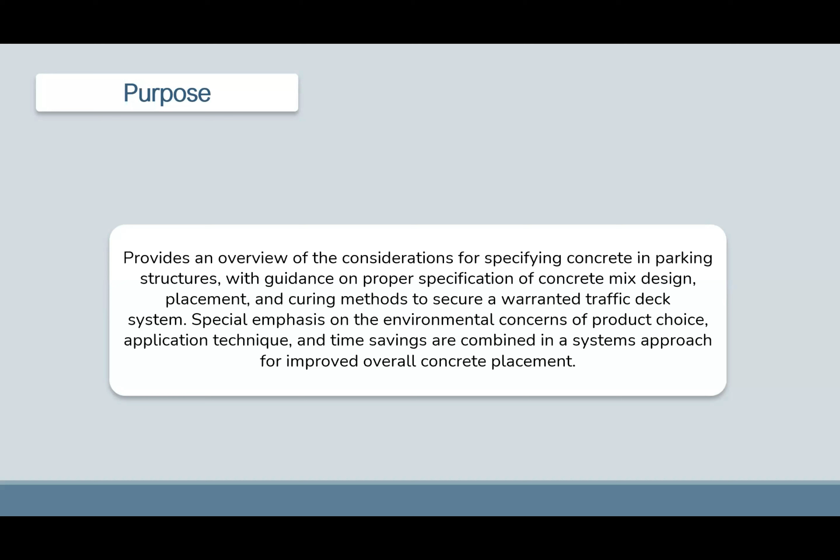In order to build a 100-year parking structure, I think it's important that we begin with the fundamentals. So I'm going to go through what I consider best practices, or steps we should take to make sure we get this process completed. I am a very linear thinker, so for those of you who have questions during the presentation, I don't want you to think I'm ignoring you. I'm going to walk through a process and a story this morning, and I will answer questions at the end of the presentation, but don't be afraid to add them while I'm talking, because we'll make sure everything gets taken care of for you.

So let's look at these four points of sustainability. This is not new information, it's not groundbreaking—I'm not introducing something you've probably never seen before—but it is important to begin a foundation of building based upon some steps that we want to take.

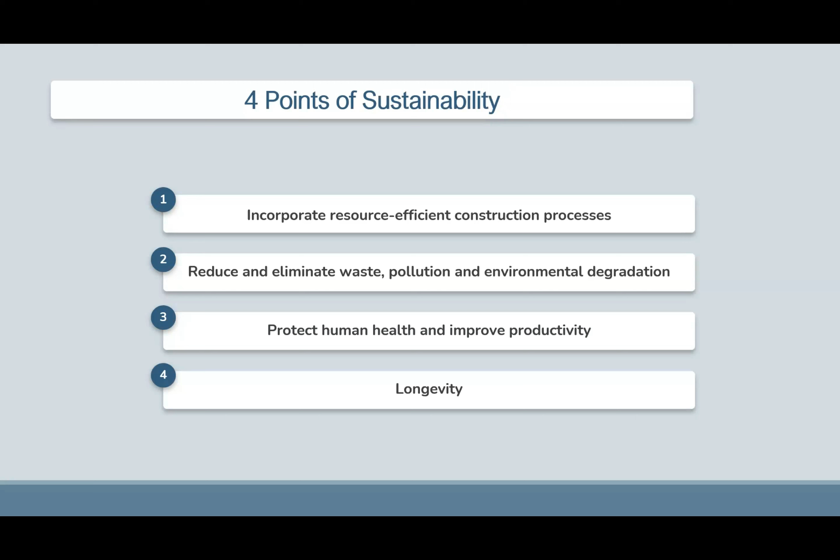We can actually take it further than that. And there's proof we can take it further, because if we're going to take on the challenge of building a 100-year parking structure, we need to make sure it's possible. And it is. You can look back.

Now there's lots of people out there today that say, hey, the Romans invented concrete, so obviously we have access to Roman technology or we've lost it. But honestly, the truth is the Romans didn't invent concrete. That's a myth - this is the nerd in me coming out. Actually, the Assyrians created it, and then they were conquered by the Romans, who took it back to Rome and built things. But that's not why we're here, right?

So this slide, I want to explain a few things. What you're looking at is a core sample - why am I showing you a diver? Obviously that's the question, right? We're talking parking structures, and the reason I'm showing you this is I want to challenge the way you think about concrete.

Now, this core sample comes from the breakwaters of Alexandria in Egypt. It is over 2,100-year-old concrete, and it's interesting in that it's harder, denser, and stronger than anything we build with today. Yet it's been subject to a saltwater environment, the harshest environment we can imagine for construction, and it's lasted for over 2,000 years.

But as architects, as design professionals, I think our goal - your goal - should be to build aesthetically pleasing, functional structures that last a long time. Now, almost everybody in architecture recognizes the bottom photo here. This is the Pantheon in Rome.

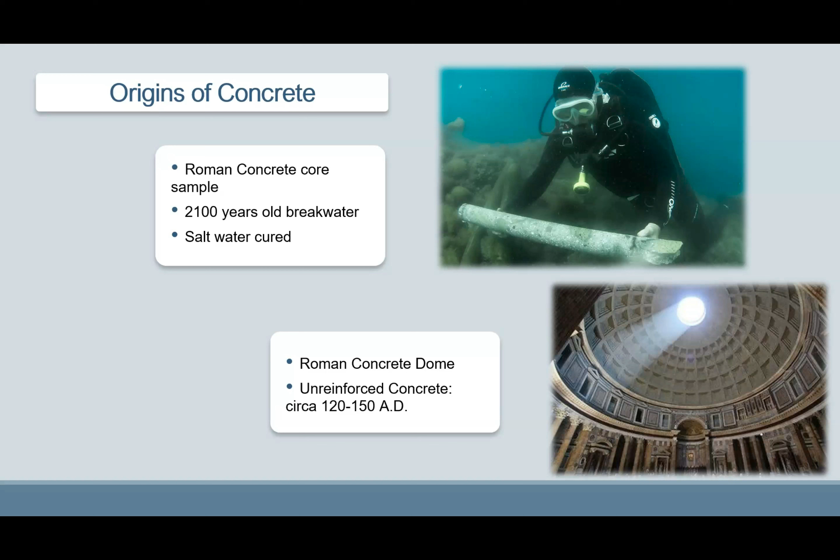So the question then becomes, well, what changed? Why is it that the Romans and others can build things that last centuries and we can't even build things to last 100 years? And honestly, we lost the information. If you think about it, we've had to suffer war, disease, famine, and pestilence. And as we've come out of this process of relearning, reinventing, and redesigning things, that's literally what we've had to do when it comes to concrete.

Structural concrete use in America is only 127 years old. It's been around a little bit longer than that, but for structural concrete, it's only 127 years old. So we got to do a little bit better.

Now, as we've come out of this dark period, if you think about this in a linear process where we've come from in our past, we've gone through the process of modifying and changing our mix designs. We started taking waste products and dumping it and burying it in concrete to make it go away, but also because we knew we had benefits. Fly ash cooled things down some. We invented secondary supplemental cements, right?

Beginning in the 1970s with the authoring and publishing of a book called Silent Spring by the author Rachel Carson, we recognized that we had to do better to improve the overall quality and health of those around us. And so we started developing VOC laws to control volatile organic compounds. EPA has managed to walk through regulations on how we process and how we manufacture materials.

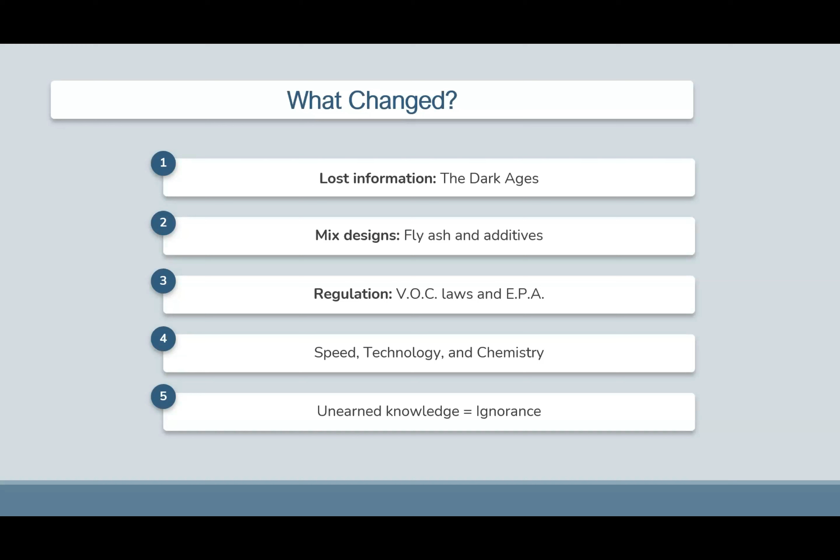So let's talk about concrete, right? What is it exactly? Well, we all kind of know what it is, right? It's the number one building material in the world today. Whether you calculate that by tonnage, square footage, or dollar amount, we build more with concrete than any other building material in the world. It's 90% of the mass of your parking structure. So what is it?

According to the American Concrete Institute, concrete is a composite material that consists essentially of blah, blah, blah. That is an absolutely boring definition. It is.

I like my own definition. Think of concrete as a complex, three-dimensional dynamic building product. If you think of it that way, it's no longer an object, it's a three-dimensional dynamic building material. We want to understand how it acts and behaves, because it has a distinct behavior. When you know how it behaves, we can control and prevent issues like cracking, dusting, spalling, and all kinds of other problems we don't want to happen.

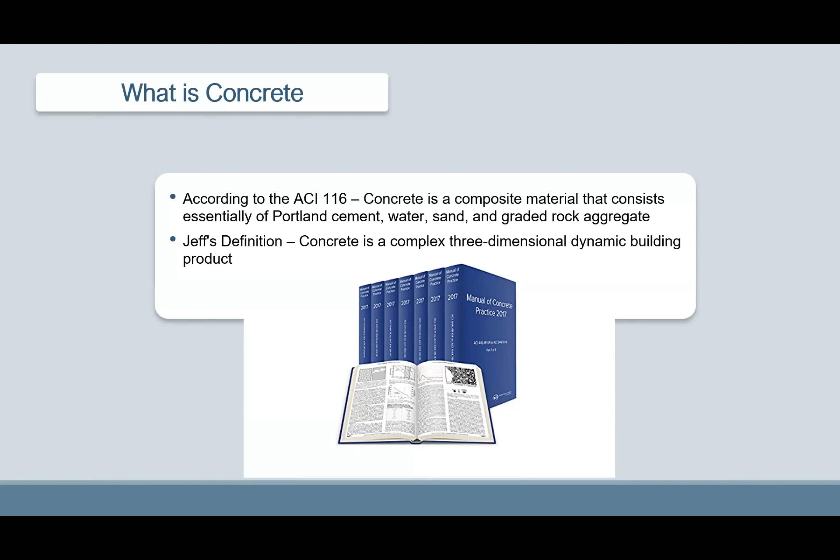So let's take a quick quiz in your own mind, since this isn't a live presentation. Are you aware that concrete has 3 states in its life cycle? See if you can choose the 3 states quickly in your mind. I wish altered states was one of them, but unfortunately it's not. So this is the concrete life cycle.

It has a plastic state, a curing state, and a hardened state. It's important to understand each of these 3 states so we can positively affect the concrete as it goes through its life cycle, and positively affecting it improves our process.

If you graph it, this is really what the concrete life cycle looks like. The moment of catalyzation is when the process begins. Notice this life cycle, like construction, is a one-way linear process. Once you transfer from one state to the next, you cannot go backwards. So it's incumbent on us to understand each state of the concrete life cycle.

The plastic state is its wet, fluid, workable state. This is the time we control the water in the mix, in the truck, and during placing.

The curing state is not only a standard period of time or a condition, but also a process, and this is where words can get confusing. Not only is it a state, it's a one-way linear chemical reaction taking place in your concrete. It's subject to change due to temperature and humidity. You can speed it up, slow it down, or stop the process, but you can never restart it. You can drive on it, function on it, and work on it in the curing state and still maintain it.

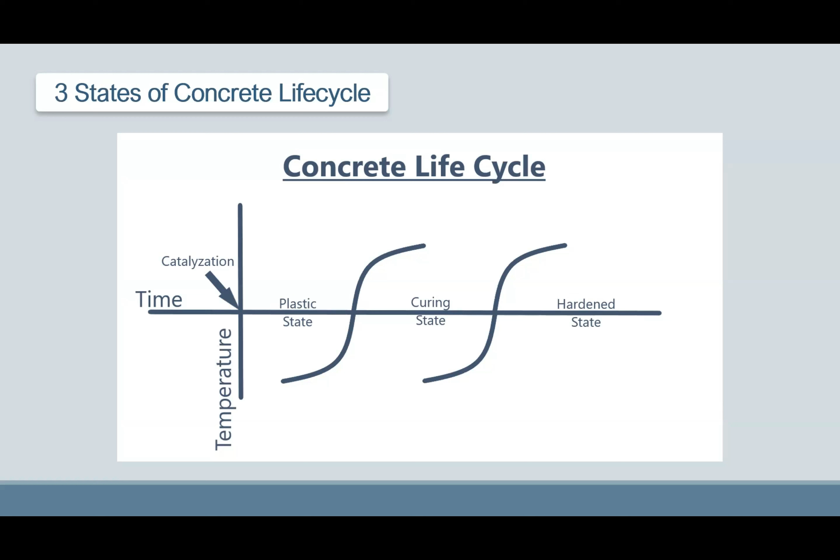So let's look at the plastic state. This is when you can most affect it with outside influences, when we can manipulate it and put it into the form we want. It's the most malleable state, so we want to be careful about the influences that can affect it.

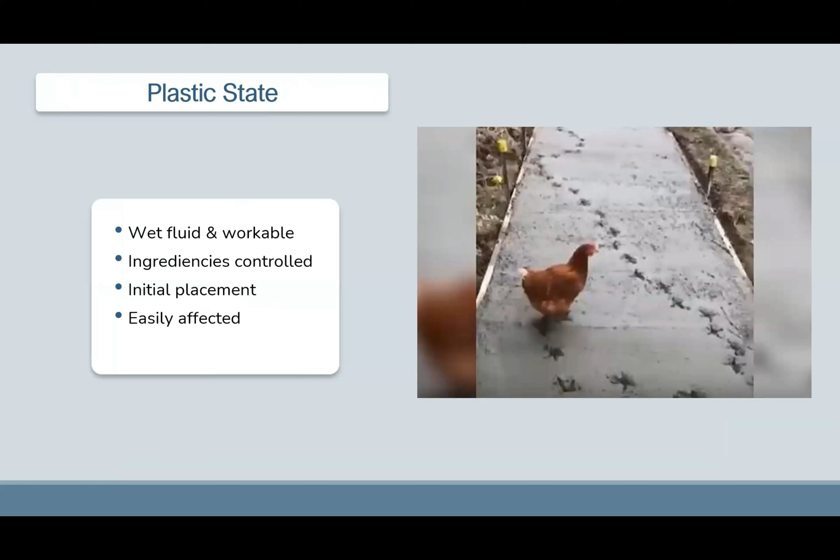I can't confirm or deny that there might have been a good barbecue after the placing of this slab, but it is easily affected at this point. So we want to know that going into it.

Now we transition into the curing state. Remember, curing is not a product. I can't tell you how frustrating it is to hear people say, 'I specified a cure.' You can't specify a cure. There's no such thing as cure — cure doesn't come in a bucket, okay?

Not only is curing a state in the concrete life cycle, it's a one-way linear chemical reaction that you have to ensure. You need to facilitate concrete's ability to cure for as long as possible, by providing adequate moisture, temperature, and time. Those are the things we need to have in place, and it's critical that we maintain this curing process as long as possible.

Well, concrete works kind of the same way. You need cement, that's your fuel, enough of it in there to do what it needs to do. You need temperature internally, inside the concrete above 50 degrees for as long as possible. And here's the cool thing, concrete is exothermic. It creates its own heat from inside. And as long as you have that and a catalyzing agent, which is water here to replace our oxygen, you can have curing.

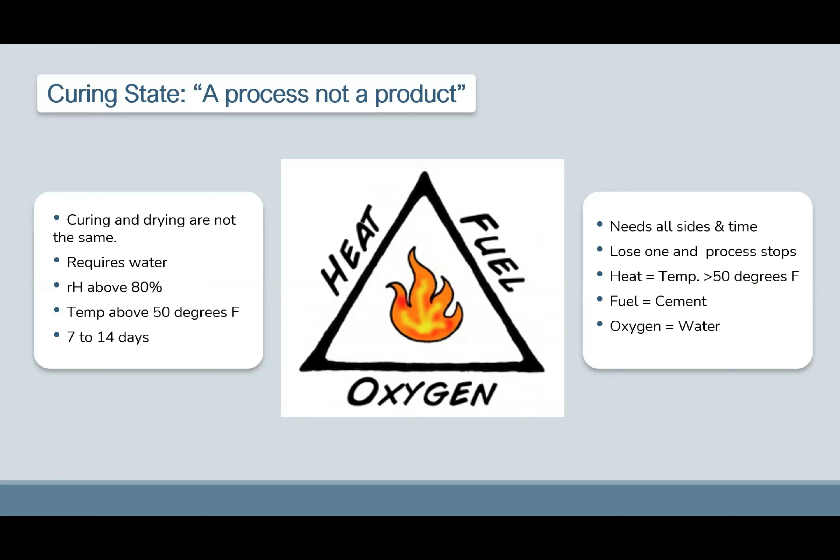And you only get one time to do this right. Once curing stops, it cannot restart. So we want to make sure that we maintain it as long as possible.

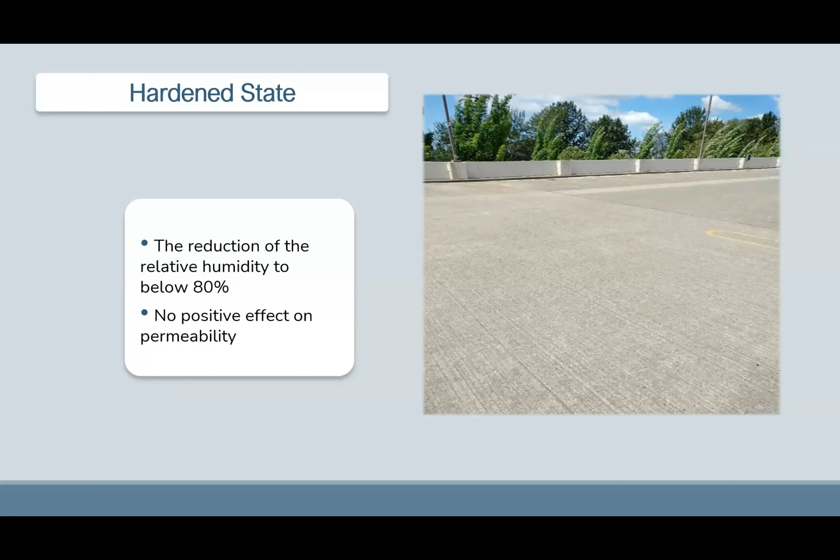The hardened state simply begins once the internal relative humidity of concrete falls below 80%. Now, that doesn't mean concrete's dry. It just means that the hardened state has begun. And a lot of times we say the hardened state and the drying state are the same thing. It's not. Don't get confused by that, because concrete can maintain moisture levels even though it's in the hardened state. But we want to make sure we understand the differences between the three.

Now, another problem we have in the industry - not only that we silo our specifications to consultants or experts - we have a problem with language. Language, especially in English, is a problem because far too often we're confusing the symptom of a problem with the actual cause or the illness of a problem. Whether it's ignorance or laziness, I don't know, but it's a common problem of trying to treat the symptom instead of the underlying problem or illness.

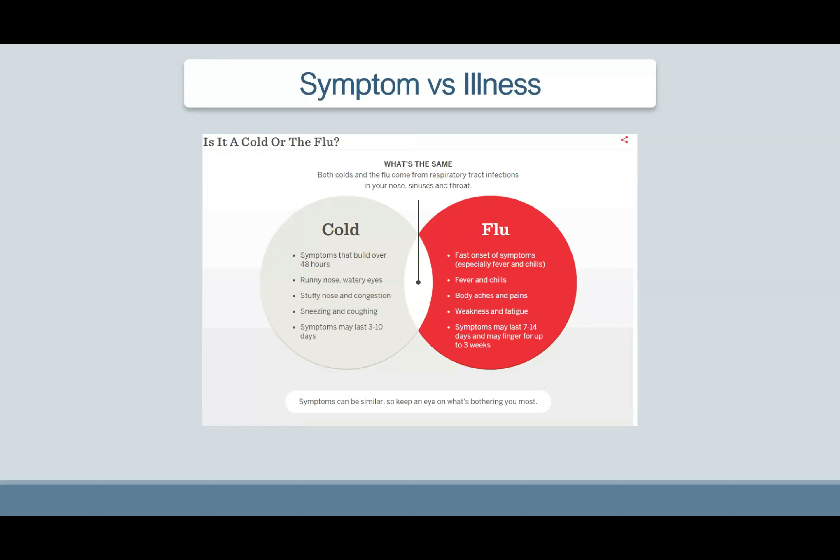So in order to prevent the problem from happening, you need to diagnose a couple of very common concrete problems that we run into. And almost all of your concrete problems begin the day the concrete is placed. And so if you know that, that's where we're going to focus our attention - the first 72 hours, if you will, of concrete placement.

Now, in North America, we've only been doing structural concrete for about 127 years. In that time, there's only two kinds of concrete you build with: cracked concrete and concrete that's going to crack. Now, I know that's a bad joke, but the reality is concrete is designed to fracture. It will break - that's why we put joints in them. But the cause of all the cracks needs to be boiled down to understanding one thing: it's simply a loss of tensile strength. So we want to improve tensile strength in concrete, and by improving the tensile strength, you will reduce the incidence of cracking.

Now, when it comes to language, another problem that we have - and I hear this all the time - all concrete cracks are plastic shrinkage cracks. That is a myth. It is not possible for a crack that shows up 7 days later to be a plastic shrinkage crack. Plastic shrinkage cracking only occurs in the plastic state, and it's usually rapid loss of moisture or misapplication or misuse of admixtures, water starving the mix, if you will.

Crazing cracks, map cracking, or curing related cracking happens during the curing state. And these can be affected through a number of things that we want to pay attention to. Mostly it's mix design, but we also want to look at proper techniques of finishing so that we can prevent things from happening. In the curing state, usually it's surface moisture loss. So here's where we like to make sure that we have special tools available for the contractor, such as evaporation retarders and finishing aids. But regardless of the reason why it cracks, we want to make sure that we're controlling it at the right time.

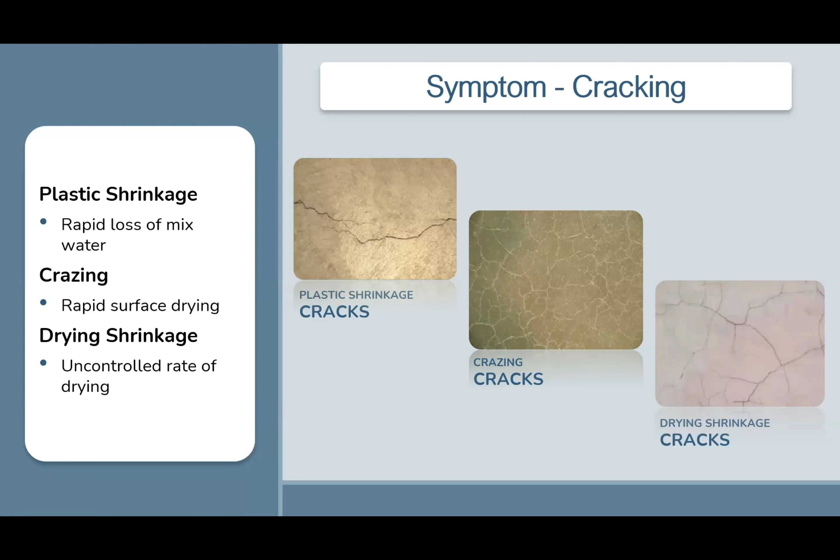So when you're looking at drying shrinkage cracks in the hardened state, you want to make sure that whatever curing method you're doing - and effectively you should be considering a curing agent - because those will actually extend the life of the concrete by controlling drying. And we can get into curing agents at the end if we have time during Q&A.

So let's talk about some other symptoms, some problems, right? When we look at dusting, this is a problem. Not only is it a problem for health and safety because that silica dust is harmful, but it's already degrading or deteriorating the surface of our concrete. And we want to make sure we can prevent this from happening.

The American Concrete Institute says there's 8 reasons for dusting. Almost all of them are water related. So the very first thing you have to do under execution for concrete placement in your spec: no water added. Please tell the contractor what not to do.

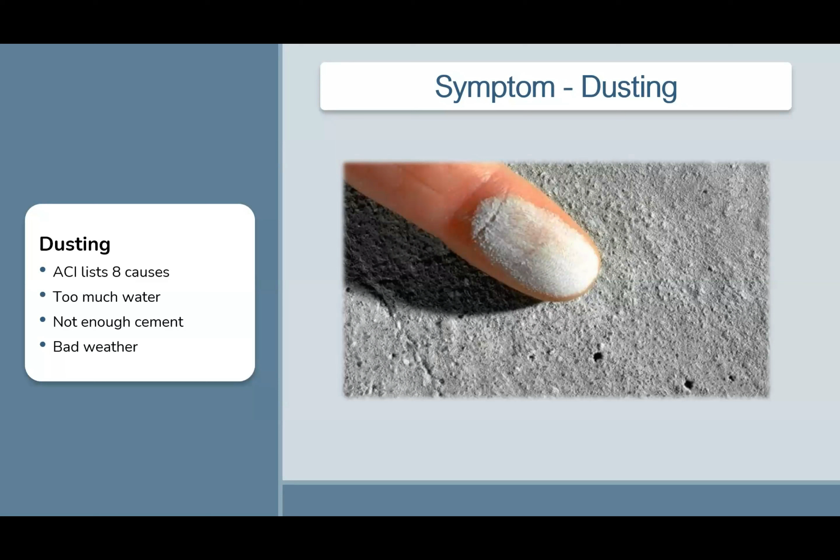Once that truck leaves the batch plant or the yard, do not add water to it. You have tools, evaporation retarders, finishing aids, things you can add into your specifications to ensure proper quality control. This is what we need to maintain, controlling the water so that we don't add it.

Curling, another problem that we run into that we don't think about often, especially in a parking structure. This affects flatness and levelness. And you say, well, it's not that big of a deal, except curling can accelerate the deterioration of the slab.

Remember, concrete's a three-dimensional dynamic object. As moisture leaves the joints faster than everywhere else, it causes deflection, or the corners to curl up or rise. And then as we drive over them, we'll break down and fracture that, causing accelerated deterioration of our structure.

So we want to make sure we do something here that's different than what you've ever been told. You're going to cure all 6 sides of your three-dimensional dynamic object equally. Controlling the variables of moisture loss will reduce or eliminate curling and save you from major repair.

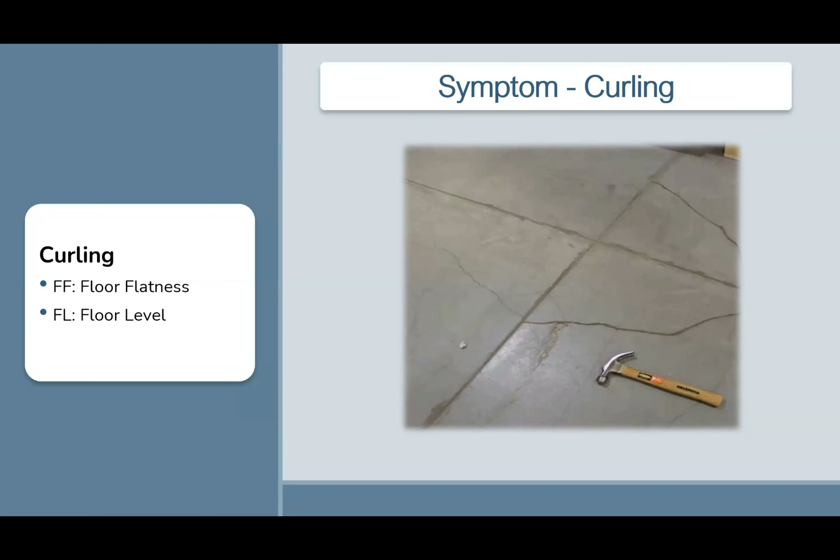All right, spalling, freeze thaw. This is another problem we have to pay attention to because we don't want to break down the surface of our structure. It is possible to place, finish, cure, and seal a product all within 5 days to make sure we don't end up accelerating corrosion of our steel, getting penetration of de-icing salts, which I know you guys are in Florida, but you do get weather down there every once in a great while, right?

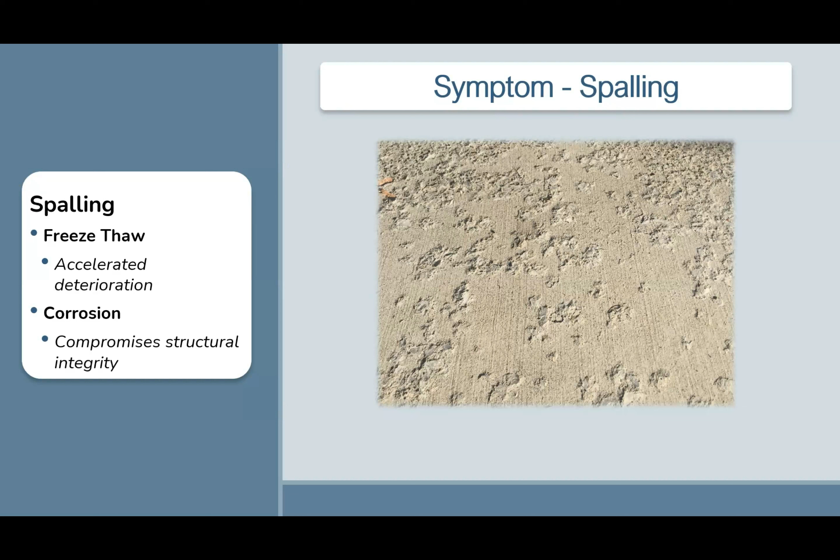But we want to make sure that we can prevent this, and we can do this by making sure we do the proper process. Here's the deal.

All of the problems that you are associating with concrete, loss of tensile strength, issues with cracking, issues with curling, all really boil down to the permeability of the concrete. They're all symptoms telling you the concrete is exchanging moisture at the wrong rate. This is the illness that we want to control.

This is what we want to make sure that we can reduce to as low a level as possible. And this will extend the life of your structure beyond measure. It really is that critical.

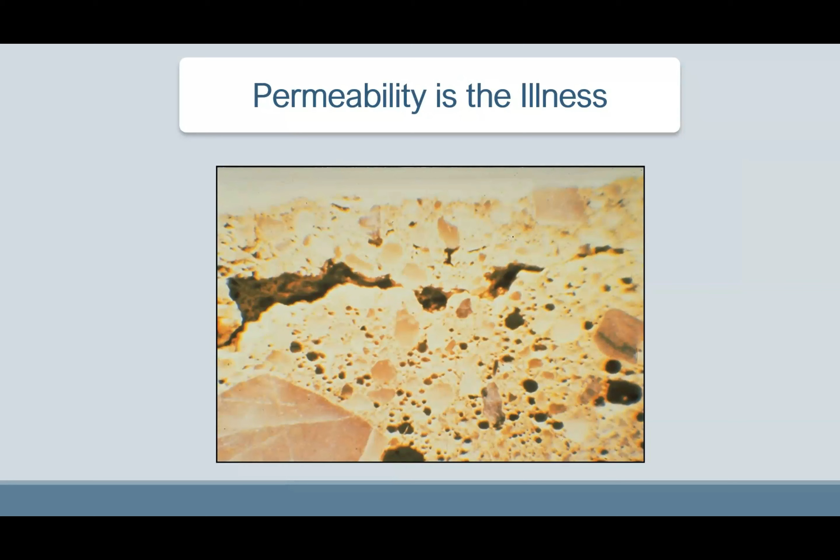So let me recap a few things, right? So we know the history of concrete. While it's been around thousands of years, structurally, it's only been here for about 127. You now see and can visualize the 3 states of the concrete's life cycle and why it's important. It's a linear process. We've gone through that.

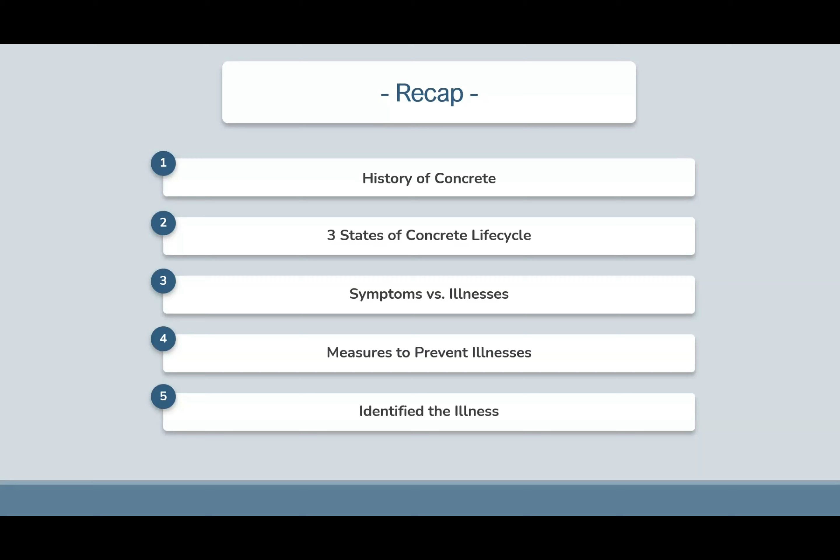We've looked at the differences between the symptoms of a problem versus the illness, the symptoms, the spalling, the dusting, versus the permeability. And we know that we can prevent the illness from happening if we can control the 3 states of the life cycle. That's what we're going to do. We've identified all that. So let's go into some best practices.

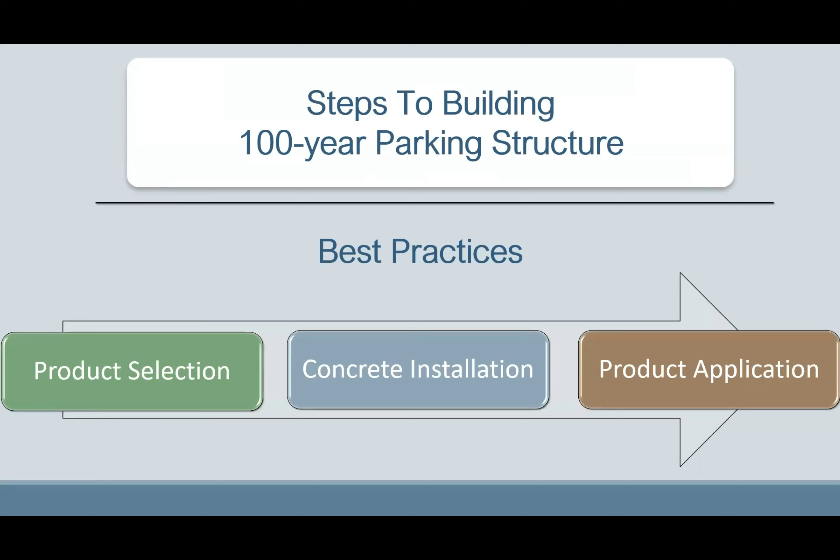How are we going to build this thing to last 100 years? And really simply, best practices for these 3: product selection, concrete installation, and product application. So product selection, step 1.

You see, price should not be a category for choosing a product at this stage. And let me tell you why. I truly believe if you go through this process, sustainability, compatibility, performance, and warranty, whatever you're left with will be the most cost-effective solution for your project, even if the bucket price may be more than you're used to seeing.

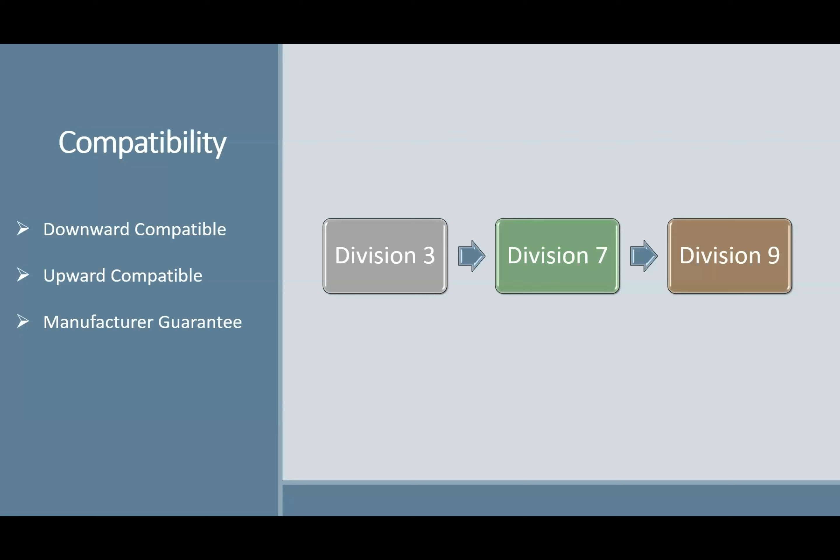When we talk about compatibility, the next one is: the product that you're specifying in Division 3, is it going to be compatible with everything that comes in the future? And consequently, or inversely, is it going to be compatible backwards? This is really, really critical, people. We want to make sure that everything is compatible. And if a manufacturer of a product cannot state in writing that their product is universally compatible backwards and forward with all future products, maybe you shouldn't consider it in your specification.

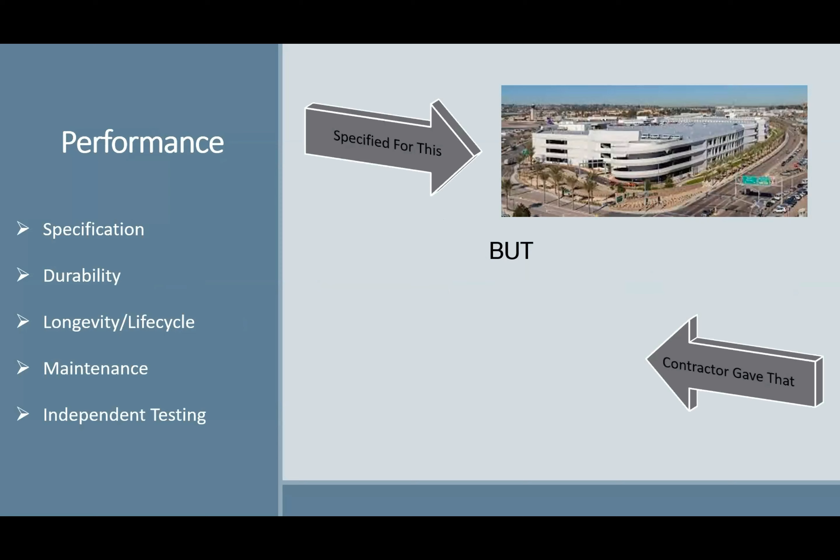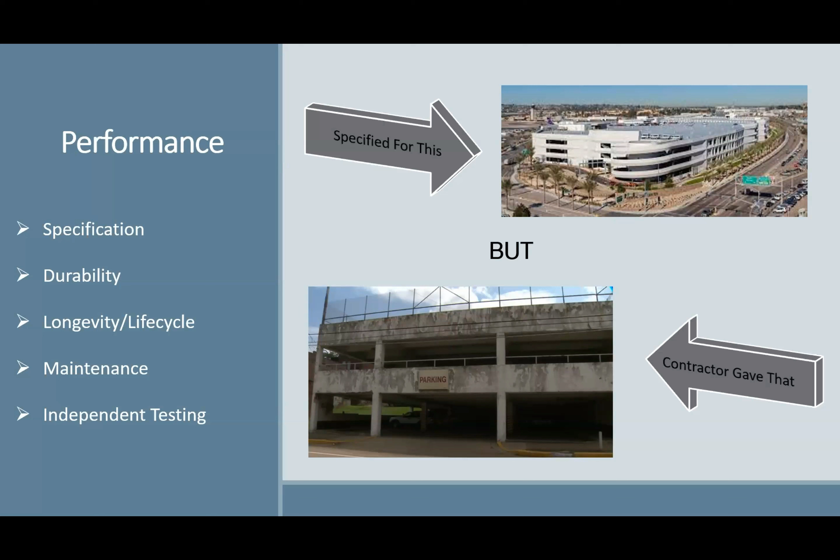Now, performance is the key. We want to write a performance specification, but we start out specifying that and we end up getting this. What happened? Well, what happened was we didn't follow the categories, the process of product evaluation. We wanted a specification that provided performance. We wanted high durability, a long life cycle, no maintenance. And yet, because of substitution requests, RFIs, and value engineering, if you're not following the step at each stage of construction, you're going to be left with less than you specified. And that's what we want to avoid.

All right, warranties. I'm not going to go into deep here. Just know you have a type of warranty, a duration for the warranty, and a scope for the warranty. Read the fine print. Make sure any substitutions for what you specified meet the criteria. And I would recommend putting all the warranty conditions in each section so that future sections know what the warranty requirements are.

And make sure they're real. Look at the exclusions, look at the fine print, because I've seen 30-year warranties for traffic deck coatings that have to be inspected every 5 years. And then you have to pay to do maintenance and repairs, or otherwise you lose your warranty. That's not a 30-year warranty. So again, do your due diligence.

All right, concrete installation. Here's your best practices. We want to make sure that we can improve this, right? So why are we going to look at these things? Because you say it's a parking structure. These are the steps that we want to take and pay attention to.

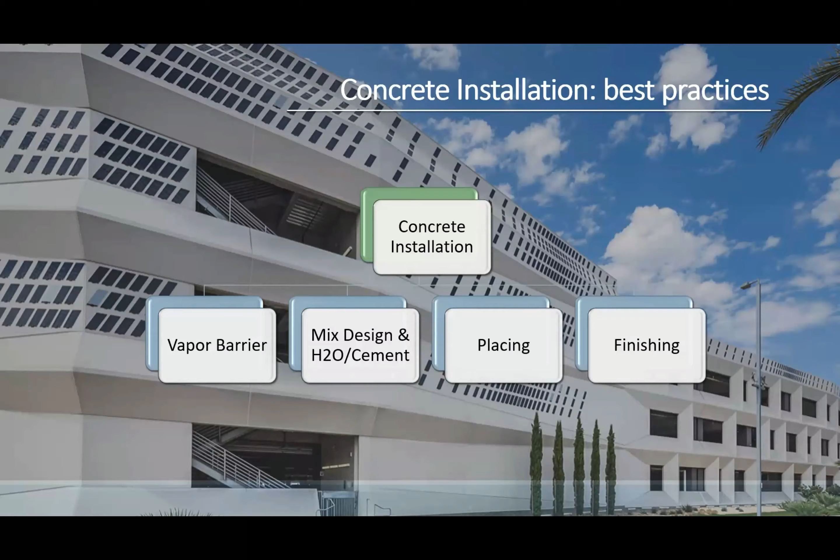First step, underslab vapor retarders. Now, this has typically only been looked at for building envelope because of flooring. But remember, three-dimensional dynamic object. We want to make the concrete last as long as possible. There are times where you're building a structure on soil that's contaminated. Even though it passes the EPA requirements, what's in there? Could be sulfates, could be nitrates. We want to use this as an under-slab curing blanket and a soil separator. Both of those will extend the life of your concrete.

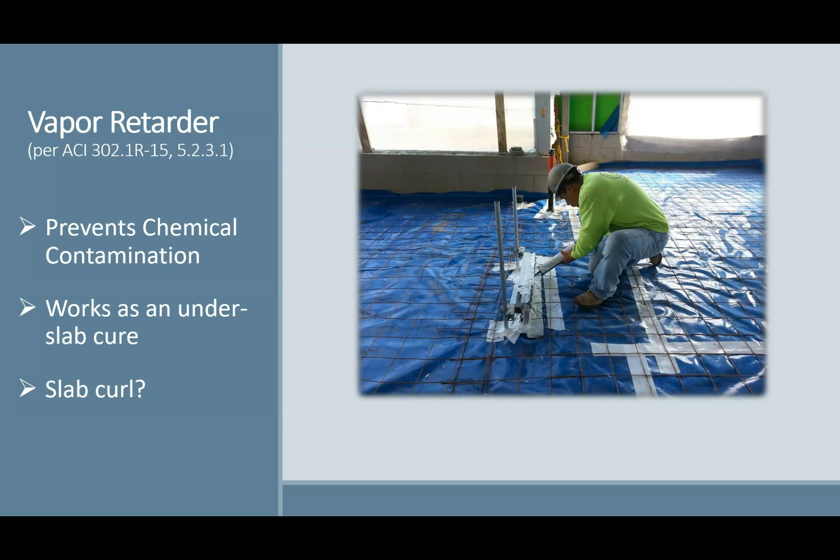And if you don't do this, you can't add it later. You get one chance to do it, right? Again, linear process. Then we want to talk water cement ratio. Now, we don't usually bring this up, but this is really important. The highest water cement ratio you should ever use in construction is a 0.50.

And that's because we want to maintain low permeability. But we want to look at this. So if you don't know, simple math: the water cement ratio is pounds of water divided by pounds of cement, and that gives you a ratio.

Now, we want it to be as low as possible because we know that humans make mistakes, and we know that contractors will add water even when you tell them not to. So the lower the water cement ratio, the better you're going to be. I usually recommend a .45 or less.

Now, the industry still has some hurdles to overcome, and one of those hurdles is the insanity that is the concrete industry. This is where we run into problems, okay? Everything that goes into that truck is calculated by weight. That's how we get the ratio. It's pounds divided by pounds.

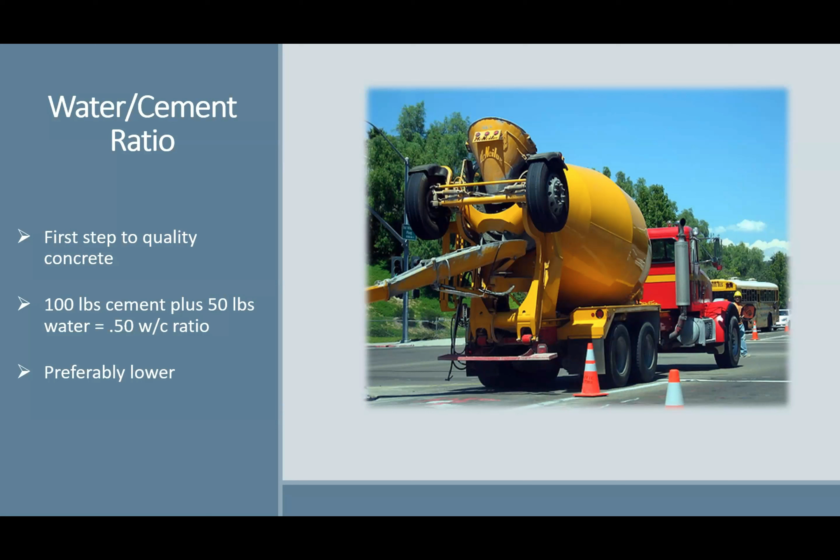That also means the sand, the rock, and those admixtures, those liquids, they have to be measured in pounds, not volume ounces or hundredweight ounces. I've had issues on job sites where people are adding things by volume into the truck—they have to be calculated by weight. But where we really get stupid as an industry is everything that comes out of the truck is calculated by volume. So we have a disconnect between the concrete finisher and the engineer writing the spec. That can be a problem.

All right, placing and finishing the concrete. We've gotten to the day where we're ready to pour everything. We've got a good mix design, we've got low water cement ratio, we know that's the key to keeping the permeability low. What are we going to do wrong? How do we prevent problems from happening at this point?

All right, so product spotlight for you. When we get to the day of placing concrete, your specifications should really include, under curing related materials, not just curing products but curing related products such as an evaporation retarder and a finishing aid. Two different products, two different categories—they're not interchangeable, so it's important to have them both there, and we want to make sure we get this taken care of properly.

So what else can we do here? Let's look at product application. We've done our due diligence, we've got a good specification, we've made sure we've got the right concrete mix design. What are the next steps? Curing properly, because that doesn't mean we're done—just because the concrete's on the ground doesn't mean we walk away. Then we need to move on to either waterproofing the concrete or sealing the concrete, which is better. And can we clean up the air? I'll show you that one too.

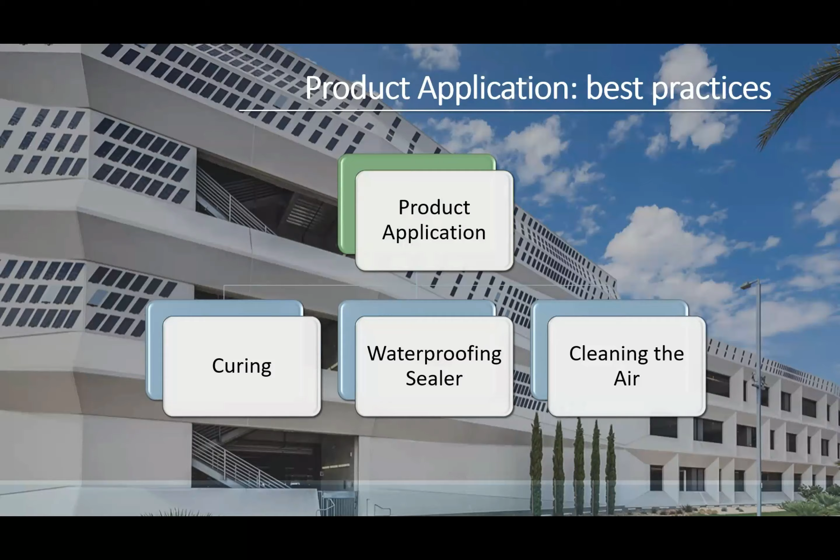Before we get there, we have to overcome a problem in our industry. We are constantly writing performance specifications, but we're not using performance criteria. Here's what I mean: ASTM produces 4 types of documents—a practice, a guide, a specification, and a test method. You should not include a specification from ASTM in a performance specification for construction documents.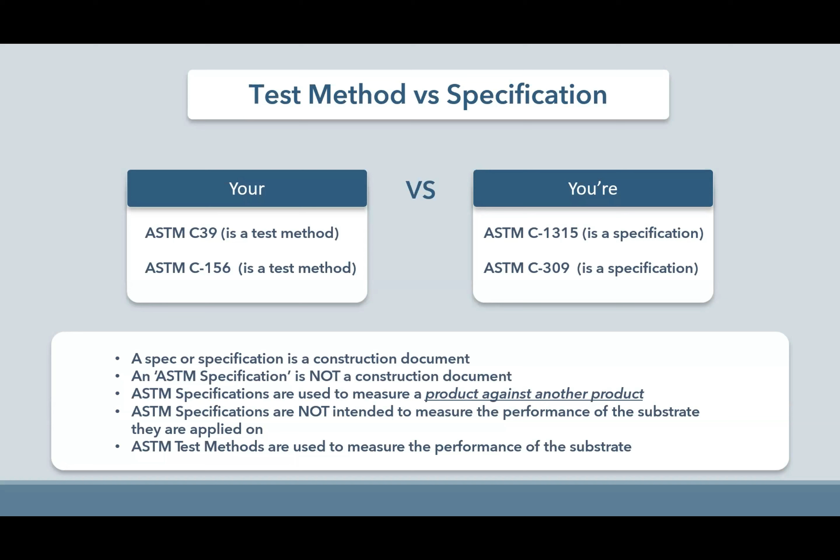I know that's controversial, you'll see why in a moment. But a water cure method is not the same as a curing compound—they are not equal. And that's why we keep running into problems, is we're not understanding the differences between what is performance-based and what is chemistry-based. Specifications are chemistry-based, test methods are performance-based. Always look for a standard test method, especially during substitutions and change orders. This is imperative that we verify performance.

All right, not all curing categories are created equal. This is where we run into problems because of master formatting and specification writing. What do we do? Alphabetical numerical order, meaning we list things in alphabetical numerical order. Even though with ASTM numbers, the higher the number, the newer the product, the higher the performance—so we run into problems. But just know that not all are created equal.

If you want to make sure we're running through the process, you're probably going to eliminate curing compounds from your spec. I know that's sacrilegious to state, but we can do it because we want to make sure we do our job right.

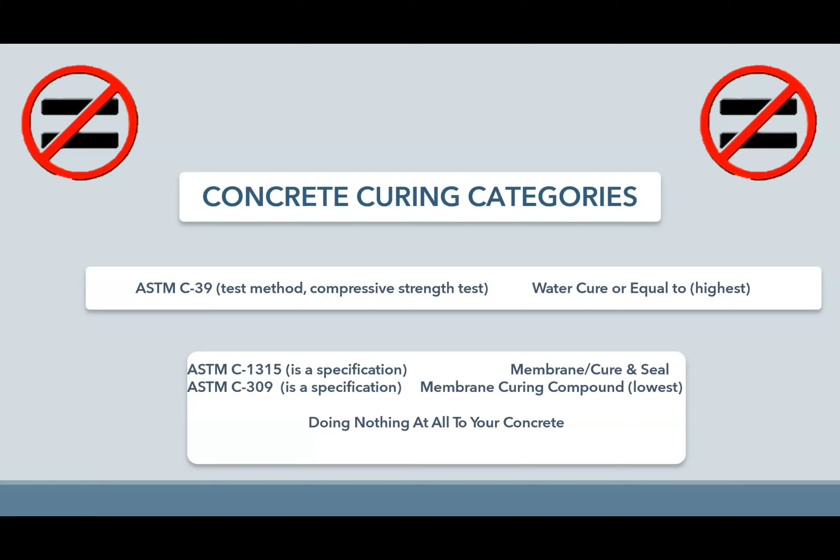Quick quiz: do you think all of those steps are equal? Well, obviously the answer is false, because I just told you not all curing categories are the same—but that's your standard master format. I would challenge you to consider reorienting this, changing this process slightly. I can go into detail offline if anybody wants to know how I've done it—I've radicalized this process.

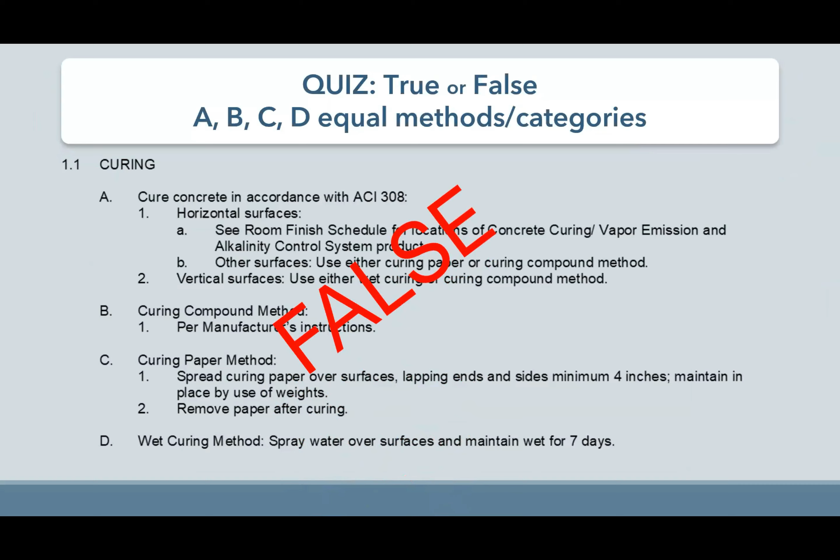What are the ramifications of using the compounds? We never talk about this. They're in everybody's specification because nobody has gone through the compatibility process, because we've siloed our specs to only looking at division 3.

But if you use a 309 compound and not a curing agent water cure equivalent type, or not a wet cure method, you will increase the rate of curling. You will prematurely dry. You will be subject to all kinds of weather events. These products have never even been tested on concrete, people. I know that sounds crazy, but I can prove it. They're going to leave your concrete permeable and they're not compatible, which means we're going to remove them. We're going to shot blast them. We're going to grind them. Dissipating cures do not dissipate. If you want to build a 100-year structure, you're not going to use these products.

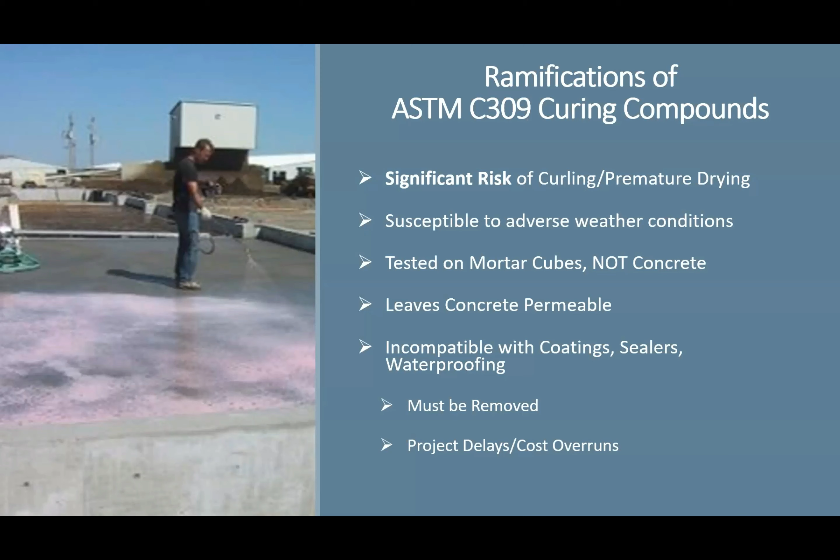What else is there? Well, we know we have water curing, but it's difficult. They say, how do you water cure a slope, Jeff? It's hard. We have time delays because contractors are always waiting for something, right? They're always in a hurry. We don't want to run the risk of accelerating the project to the detriment of the project.

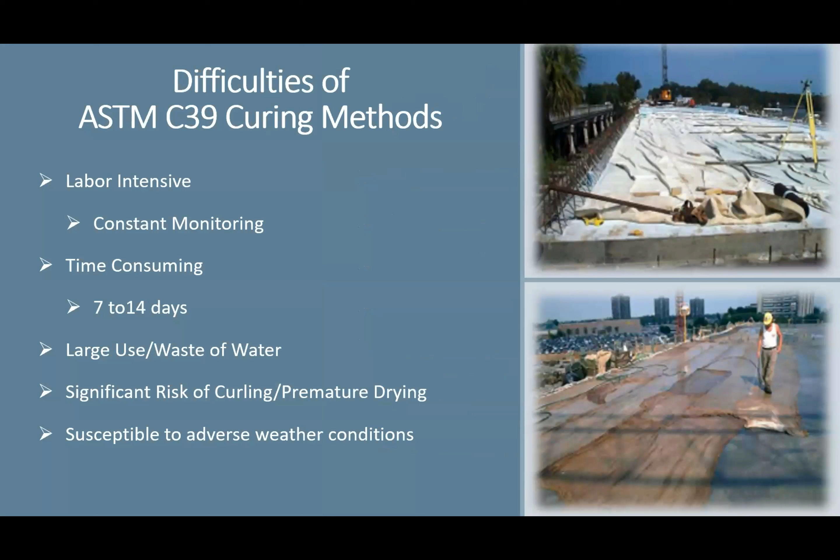So in the past, these are what you've been told, okay? Not all curing methods are equal. We know this. But if you're going to build a 100-year structure, you want to have the highest quality concrete. We want to affect it properly. And here's how we do it.

These are what you've always been told: dam and flood, poly sheeting, absorptive covers, water fogging. All time consuming, all difficult, all labor intensive, all shunned by the contractor, which is why we keep ending up with compounds that don't work.

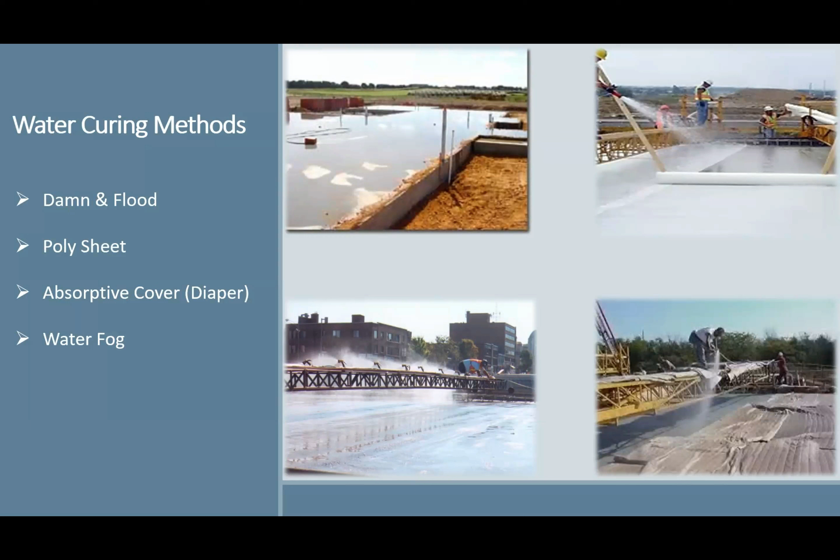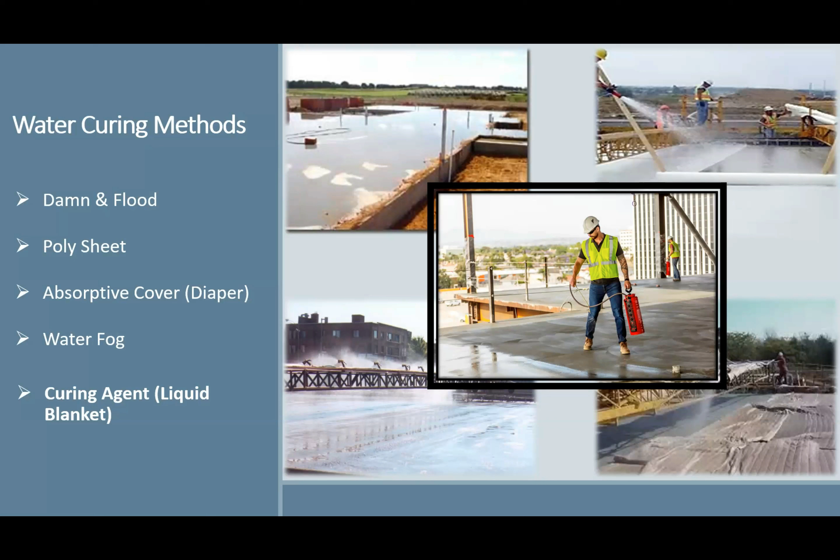There's a new product category out there, curing agent water cure equivalent type. Think of these as liquid blankets. They're penetrating chemicals that act or form a membrane under the surface so that they're universally compatible. There's multiple manufacturers that have met this standard. I want you to be aware of it.

Okay, after we've cured the concrete, let's talk about how we're going to seal it. Now, traditionally, we water cure because we know we're going to put a penetrating sealer over the top, right? And if you're a movie buff, you'll catch the quote, 60% of the time they work every time. I know, let that sink in. But what do we want to achieve? Do we want to repel water temporarily, or do we want to waterproof the structure so that water never comes in? We need to pay attention.

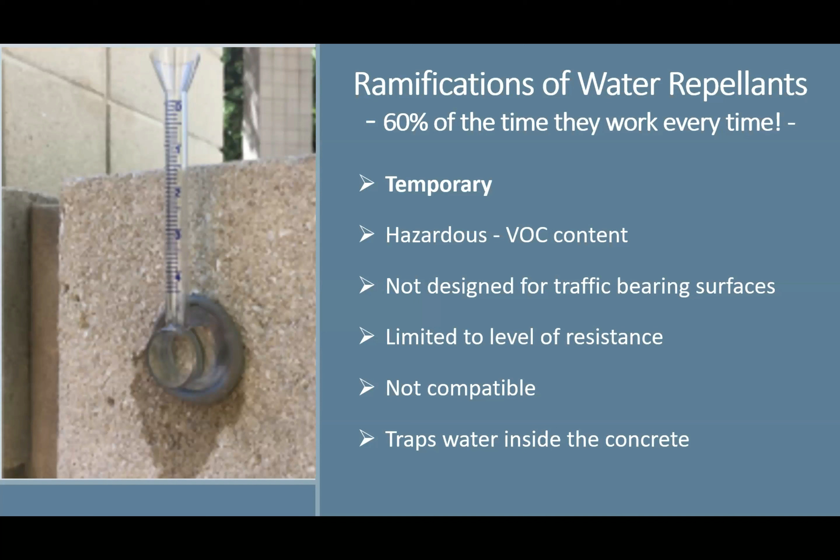Water repellents are temporary. You can break the surface tension and get water to go in. They're not designed for horizontal traffic surfaces. They are designed for vertical overhead columns and beams. But we've made a mistake somewhere along the line and started using them on the wrong parts of the structure.

Look at the types of sealers, penetrating sealers, waterproofing coatings. What's the warranties? Make sure we get all that answered.

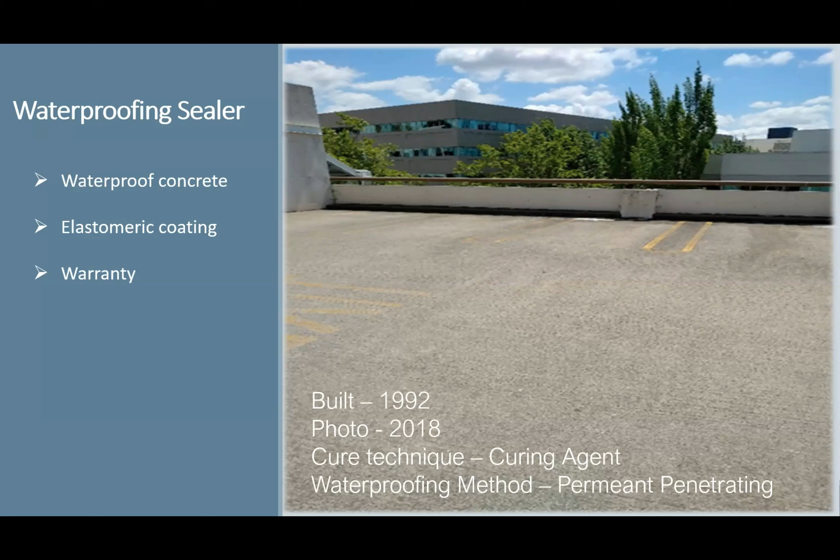All right, the last thing you can do, this is new, this is state-of-the-art technology that is available on the marketplace. There are 3 ways of achieving this at varying costs, but I want you to be aware of them. There have been significant advances in technology where you can now convert a concrete structure into a photocatalytic converter. What that means is we can actually exchange with tailpipe emissions and clean the air inside your structure, up to a level of about 60% reduction in tailpipe emissions. Totally different presentation, just want you aware of that. If you want to investigate it, I can provide information later.

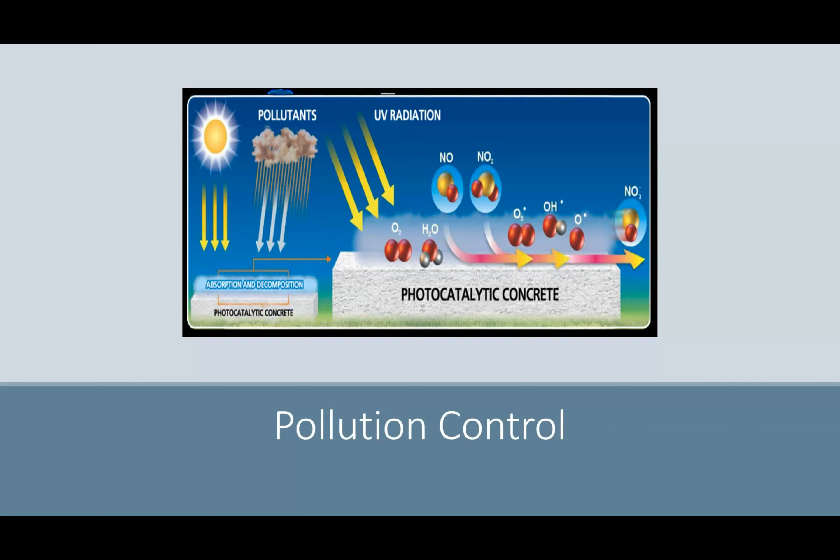All right, I want to challenge you to challenge your specifications. Here's what we need to do. Don't be afraid to ask if things should be done, right? Remember Malcolm? Remember Jurassic Park? We have to make sure we're performance basing our specs, not chemical or molecular makeup, because some chemistries are not compatible.

We also want to make sure we control and improve the specification. Make sure we're communicating. Ask Division 7 and 9 what conditions they need to work properly, and have them give it. It's easier for them to do it in the beginning. Also, does a substitution request or product change the product cost or the project cost? Go back to your best practices for each step of the process. And then always use the 4 pillars of product evaluation to do that. We know we can do it.

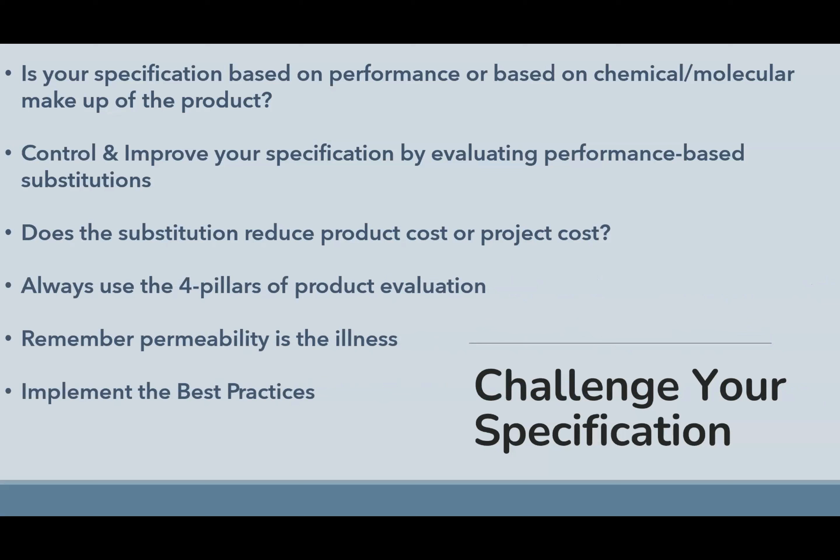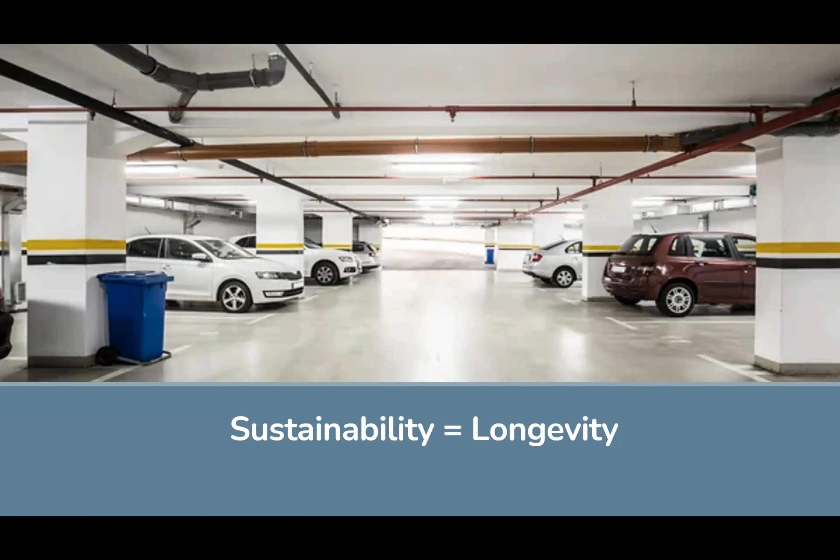Remember, it's the permeability that we want to control, not the symptoms we've been told in the past are our problem. Implement these best practices, and you can end up with a properly selected product system in your specification. You can ensure compatibility across divisions, follow the installation processes to get optimal performance, and apply the right curing agent and waterproofing and sealing to get a 100-year structure. It is possible. We can do this. All right, this concludes the credited AIA portion of the presentation.